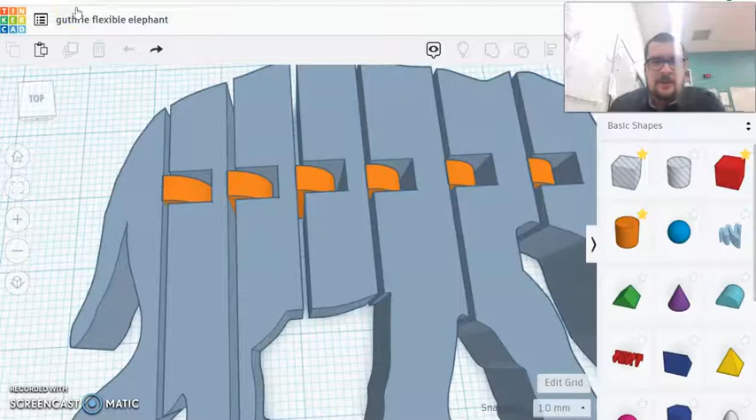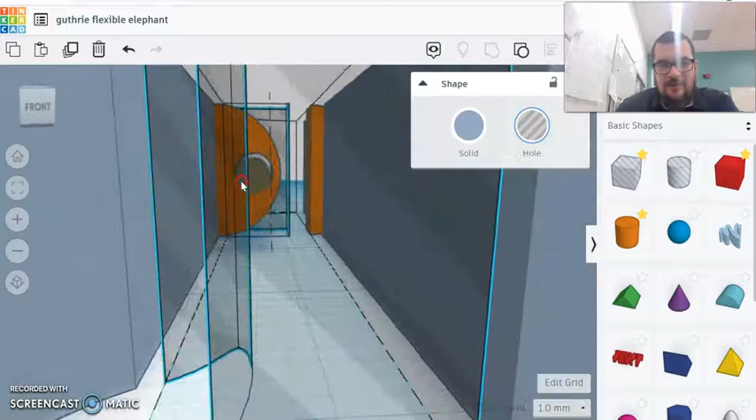So how this connector works is if we make this hollow, you can see that there is this roof piece right here, and we've got a cylinder going through a hole in there, and if you look around it's not touching anything, so when it prints it won't be touching anything. This piece is able to do this because of the holes in there.

So each one of these is going to be exactly the same. So when you get down to it, you can pretty much cut and paste the rest of the project. Just got to be very precise where you put everything. So this is just the example. If we go back here, okay.

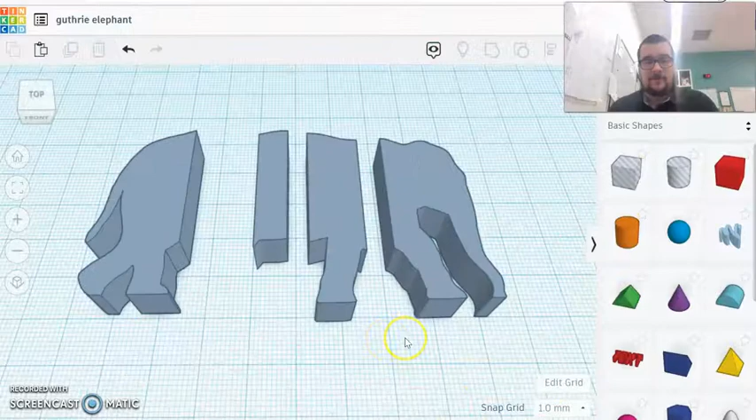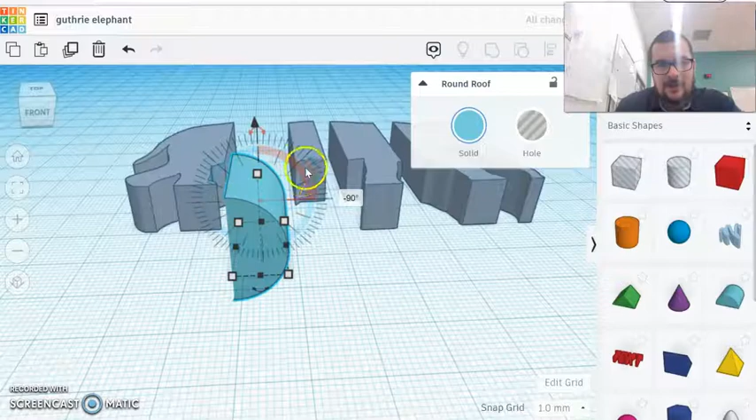So first thing we're going to do is put a round roof piece right here, and we're going to rotate it so it's sitting upright. I'm going to go here and rotate it 90 degrees, and make sure you're using the inside set of lines here when you're rotating it, not the outside set. So we got 90. I'm then going to lift it up so the bottom is resting right here on the ground, and I'm going to shrink this down to match the height of the elephant.

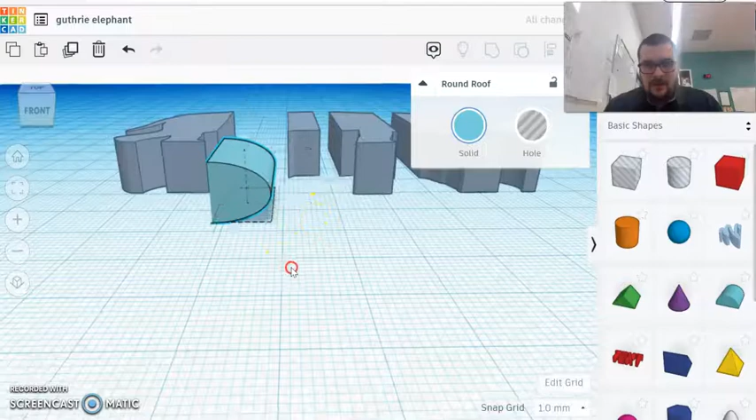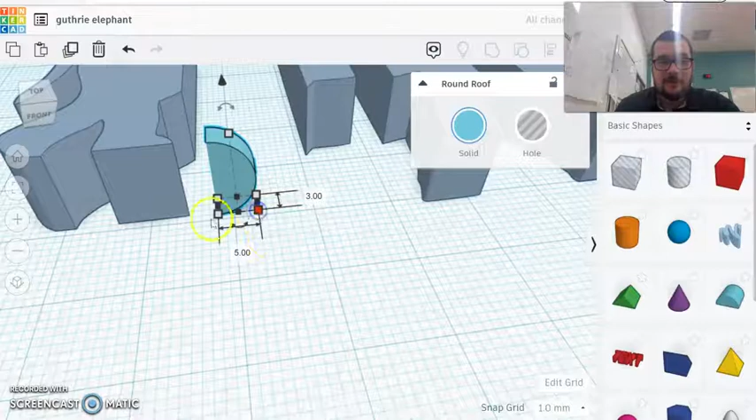The elephant is 10, so it's at 10. And then our dimensions here, right now it's at 10. We want this to be 5 millimeters from here to here, and then this side here we're going to make 3. So it's 10 millimeters high, 5 millimeters this way, 3 millimeters this way.

Now this is going to be the same one we use each time. Actually, before I do that, next we are going to get a... Alright, next we're going to pull in a hollow cylinder, and again we're going to have to rotate this 90 degrees.

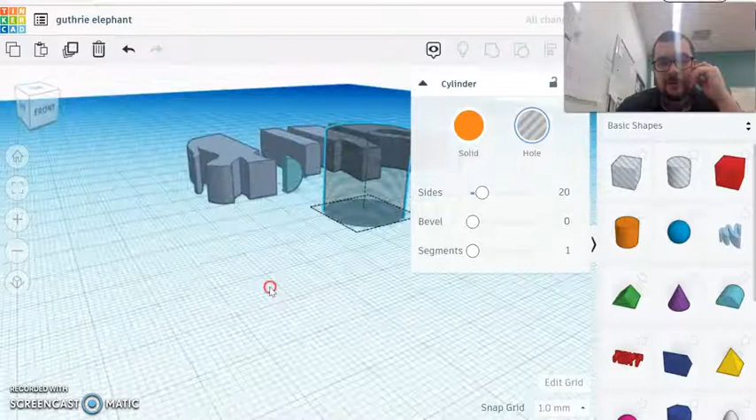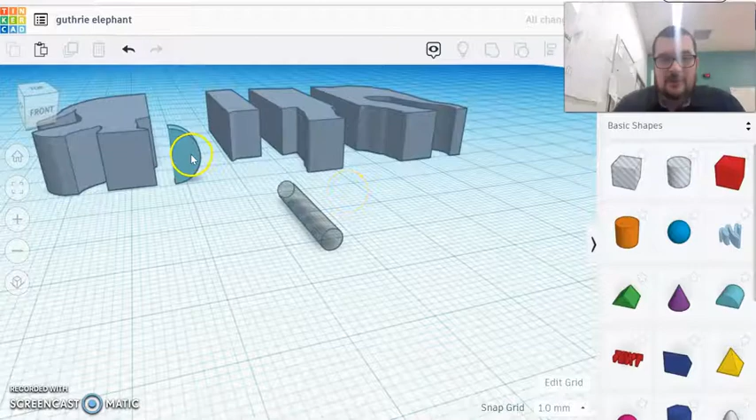Now the height and the length of this you're going to want to be 3 millimeters, so I'm going to change this to 3, and the height I'm going to change to 3. So this is going to be that hollow piece that's going to put the hole right here through our roof piece.

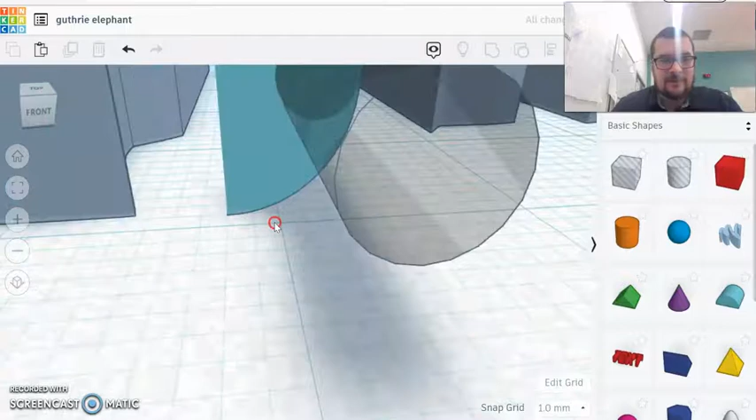So I'm going to move that, and you're going to want to pretty much put this in the middle, as close to this edge as possible. So I'm actually going to select both and align them. So right here we are in the center. Now that's too close, so I'm going to move it right about there. I'm actually going to let it go a little bit over. There we go. Okay, so once you have the positioning good, you're going to want to group these two together.

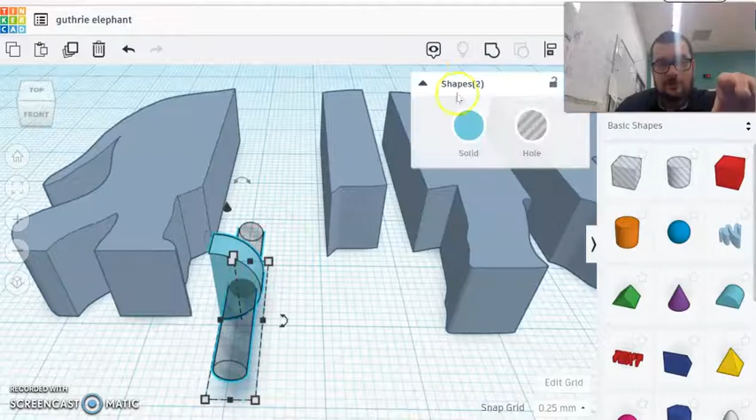Actually, before you do that, sorry, I'm going to duplicate and repeat and move one of these out here. I'll show you why in a second. So we're going to group these. There we go, that hole is now there.

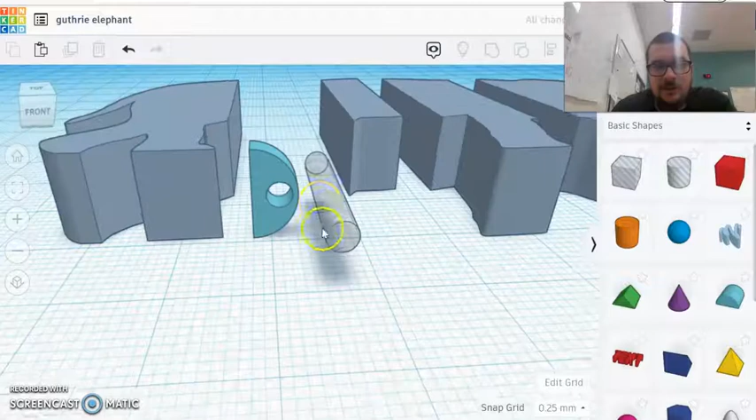Now this cylinder here, we're going to use this as the physical cylinder that goes through this hole right here. But first we have to adjust it. So we're going to shrink it down from 3 millimeters to 2, do that over here as well, and we're going to make it solid.

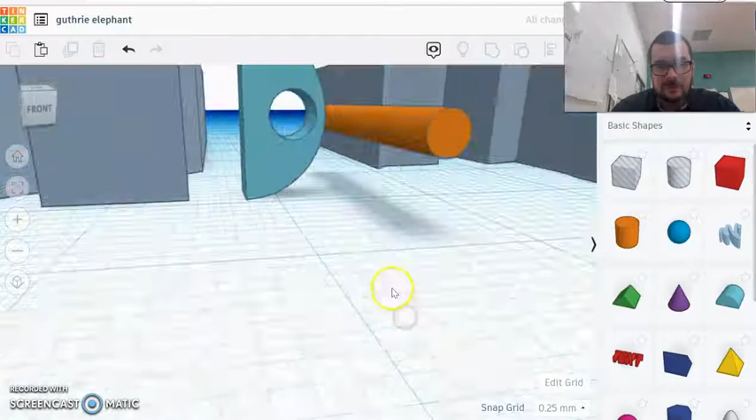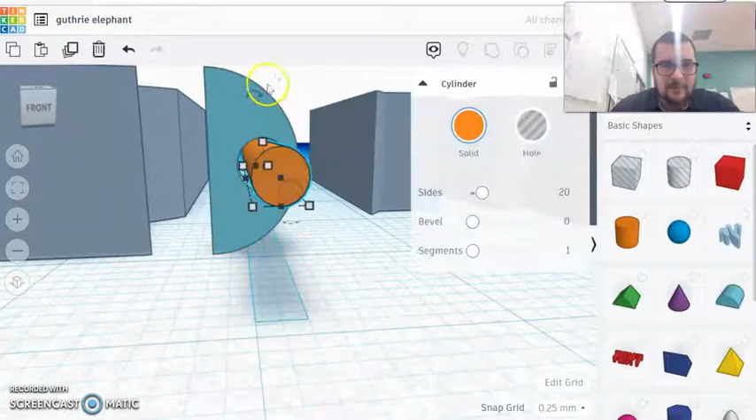And I'm just going to slide it in here. Now again, we're going to want this to be right in the center, best we can, of the hole we just made. I'm going to lift it up... a little too high, I'm going to drop it down a little bit. Okay, as long as it is completely not touching, you did this right.

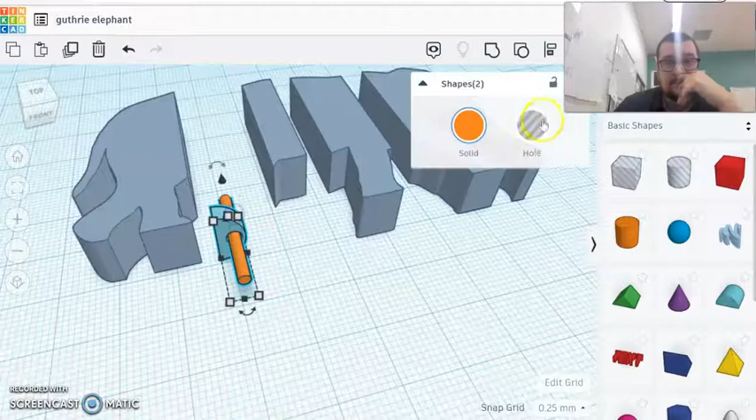I'm also going to... actually, that should be fine. Okay, once you get this done, I would group it together, and I'm going to put it right about here.

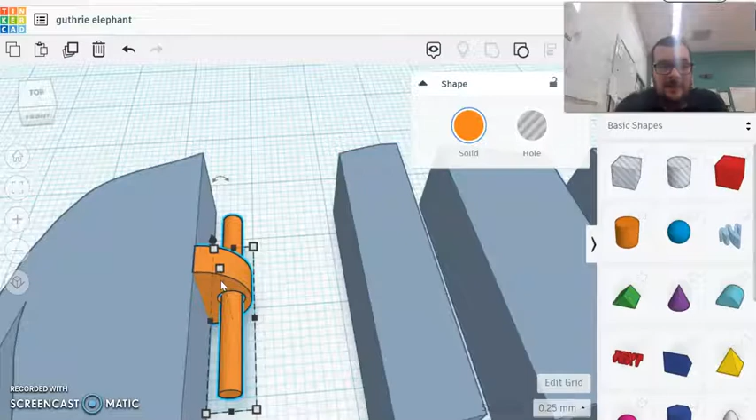Now you want to make sure you can see this little line here shows that this piece is slightly inside of the elephant. The biggest mistake kids make on this project is not connecting this piece with this, so when I print it, it just kind of pops apart.

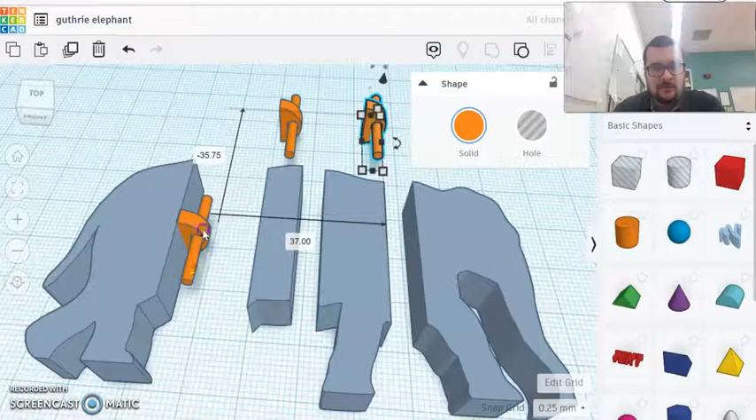Now with this part, once that's done, we can duplicate it a few times, so we have one for each divide, so I don't need that one. Okay, next... actually, we'll take a break there, and I'll split this in 3 videos. So the next one I'll show you the next step.